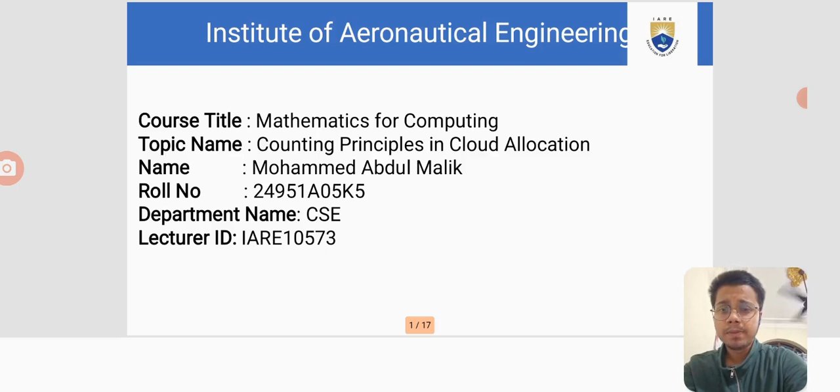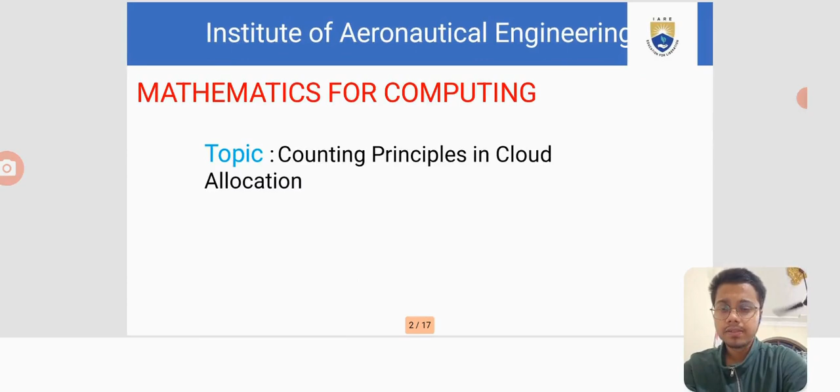My name is A. Malik and I am from CSE Department, D section, and I am here to display my complex engineering problem on the subject of mathematics for computing, and my topic name is going to be counting principles in cloud allocation. Let's begin.

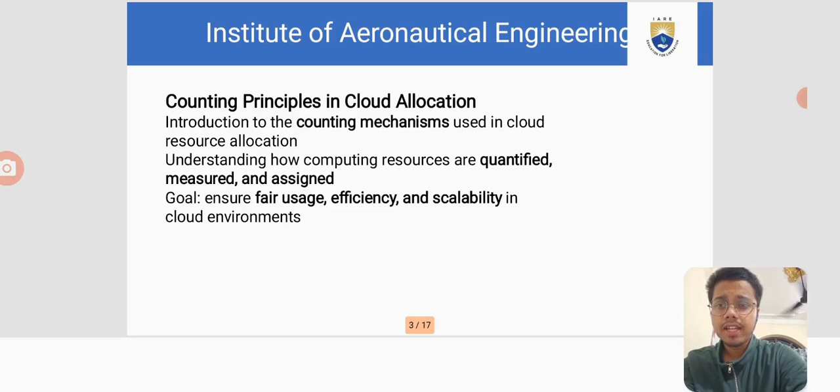Counting principles in cloud allocation. This consists of an introduction to the counting mechanism used in cloud resource allocation. Understanding how computing resources are quantified, measured, and assigned. The goal is to ensure fair usage, efficiency, and scalability in cloud environments.

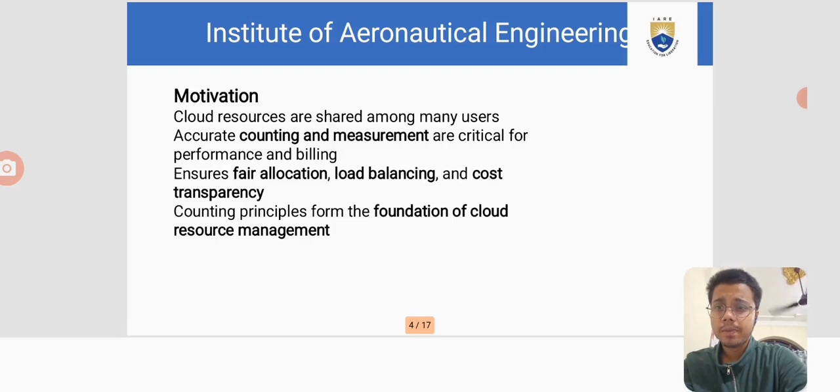The motivation behind it is that cloud resources are shared among many users. Accurate counting and measurement are critical for performance and billing. Ensure fair allocation, load balancing, and cost transparency. Counting principles form the foundation of cloud resource management.

What is cloud allocation? Basically, cloud allocation means assigning computing resources like CPU, memory, storage, or bandwidth. The goal behind it is to allocate resources dynamically based on demand and policy. Counting principles define how many and which resources are assigned. Ensure balance between efficiency and availability.

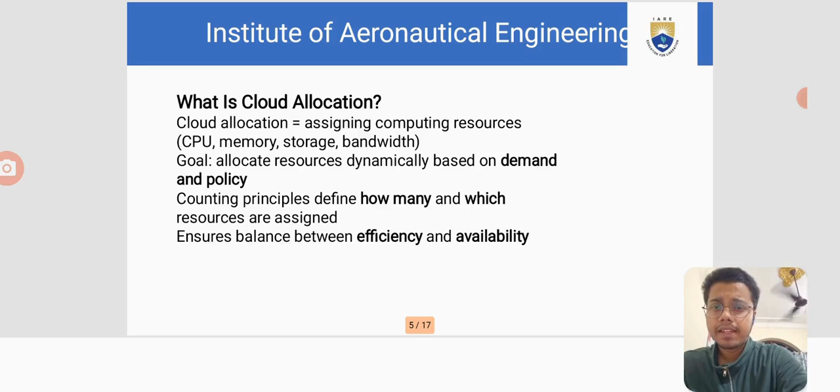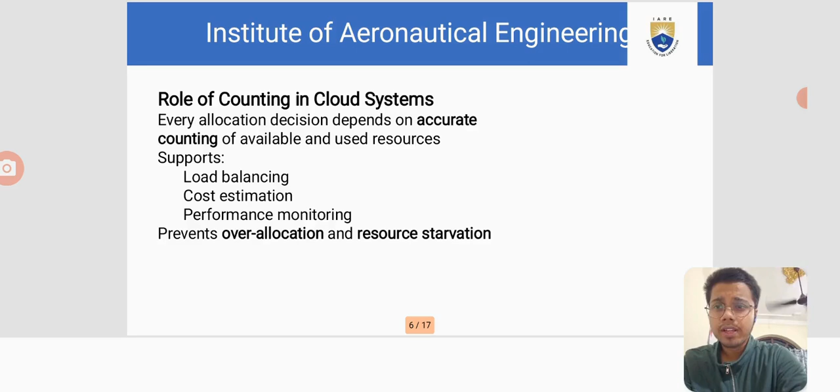The role of counting in cloud systems. Every allocation decision depends on accurate counting of available and used resources. Supports load balancing, cost estimation, performance monitoring, and prevents overallocation and resource starvation.

Fundamental counting principles. Basis of combinatorial logic used in cloud scheduling decisions. States that if there are m ways to do one task and n ways to do another, there are m × n ways to do both. Applied in cloud environments to estimate resource distribution combinations. Helps determine possible allocation outcomes efficiently.

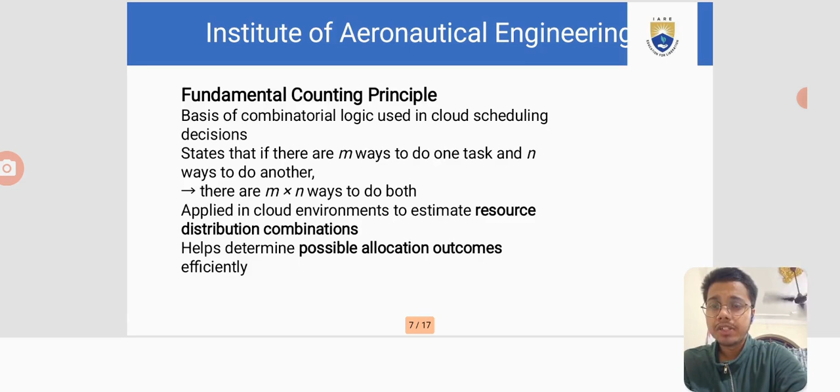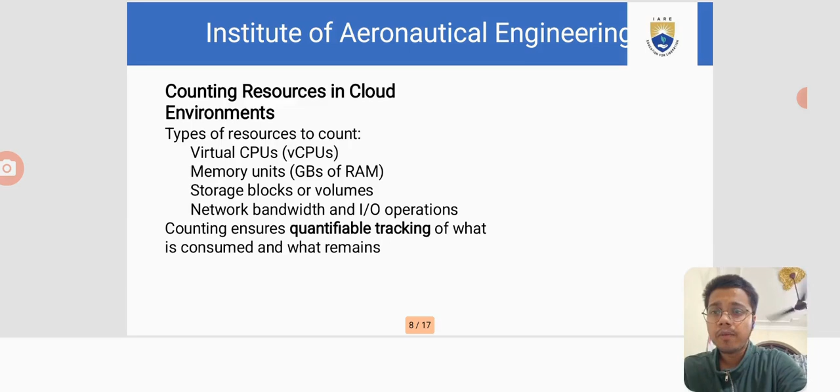Counting resources in the cloud environment. Types of resources to count: virtual CPUs, listed in short form as vCPUs; memory units, GBs of RAM; storage blocks or volumes; network bandwidth and I/O operations. Counting ensures quantifiable tracking of what is consumed and what remains.

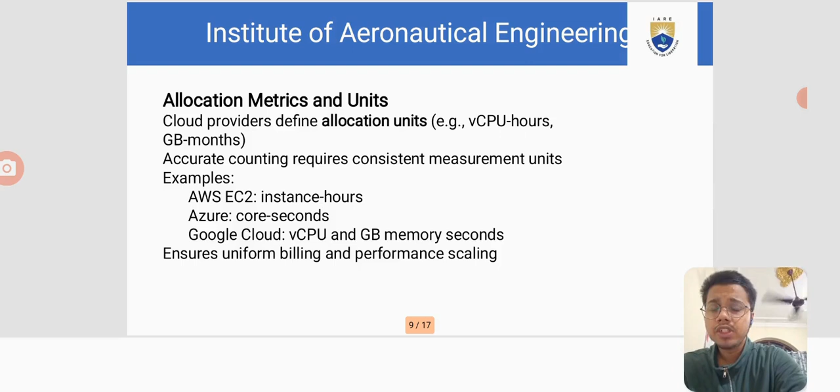Allocation metrics and units. Cloud providers define allocation units, for example, vCPU hours or GB months. Accurate counting requires consistent measurement units, for example, AWS EC2 instance hours, Azure core seconds, Google Cloud's vCPU and GB memory seconds. Ensure uniform billing and performance scaling.

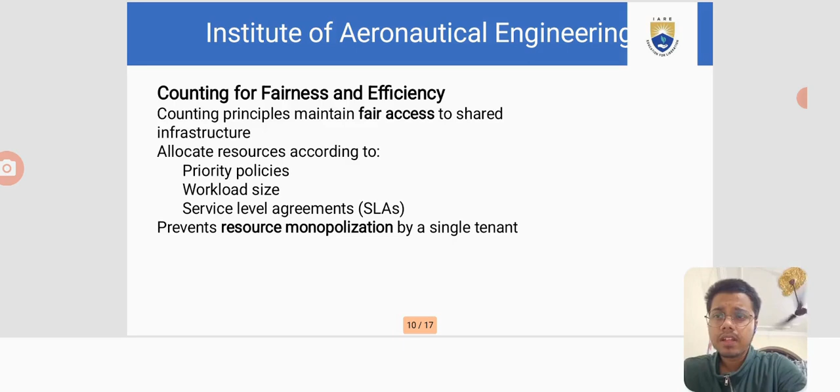Counting for fairness and efficiency. Counting principles maintain fair access to shared infrastructure, allocate resources according to priority policies, workload size, and service level agreements, and prevent resource monopolization by a single tenant.

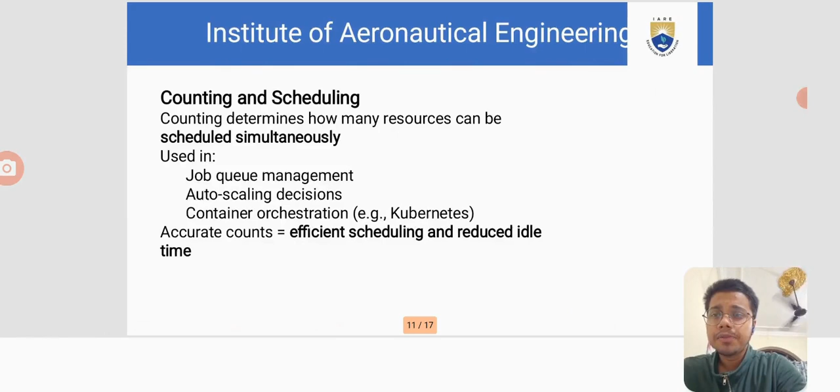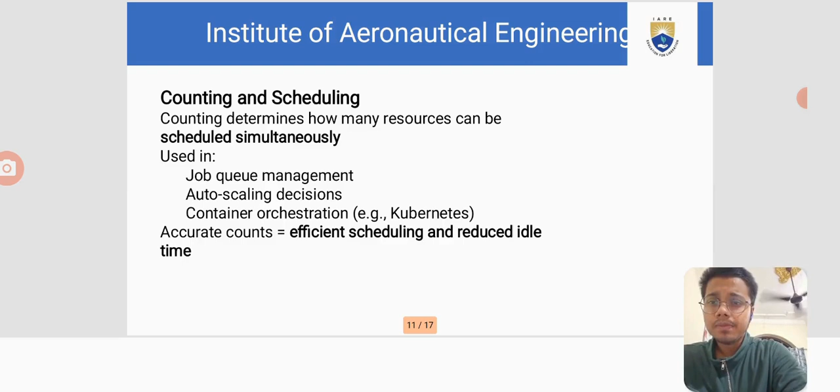Counting and scheduling. Counting determines how many resources can be scheduled simultaneously, used in job queue management, auto-scaling decisions, and container orchestration, for example, Kubernetes. Accurate counts equal efficient scheduling and reduced idle time.

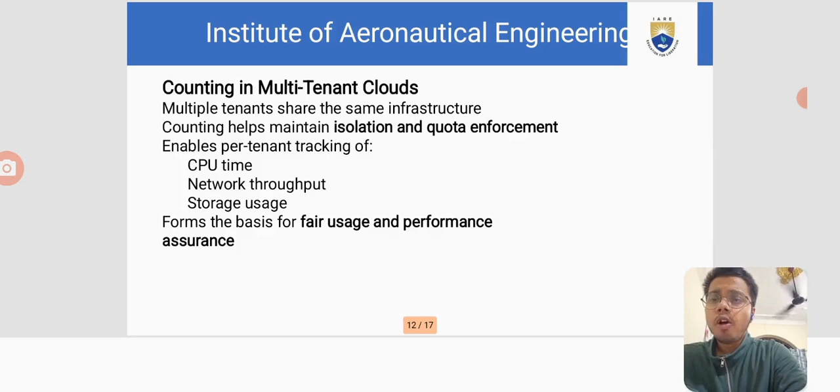Counting in multi-tenant clouds. Multiple tenants share the same infrastructure. Counting helps maintain isolation and quota enforcement. Enables per-tenant tracking of CPU time, network throughput, and storage usage. Forms the basis for fair usage and performance assurance.

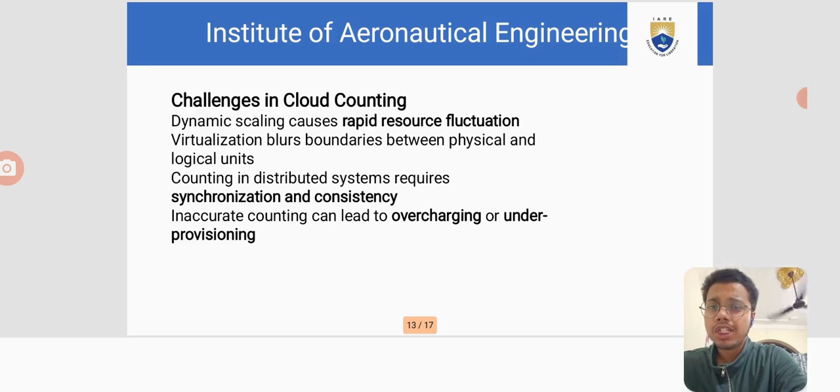Challenges in cloud counting. Dynamic scaling causes rapid resource fluctuation. Virtualization blurs boundaries between physical and logical units. Counting in distributed systems requires synchronization and consistency. Inaccurate counting can lead to overcharging or under-provisioning.

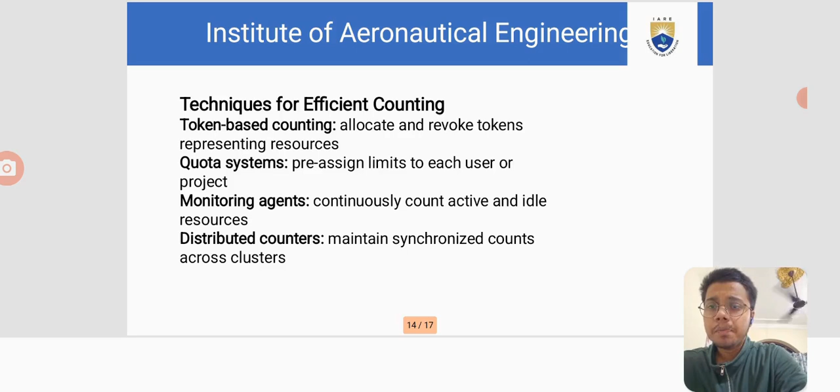Techniques for efficient counting. Token-based counting: allocate and revoke tokens representing resources. Quota systems: pre-assign limits to each user or project. Monitoring agents: continuously count active and idle resources. Distributed counters: maintain synchronized counts across clusters.